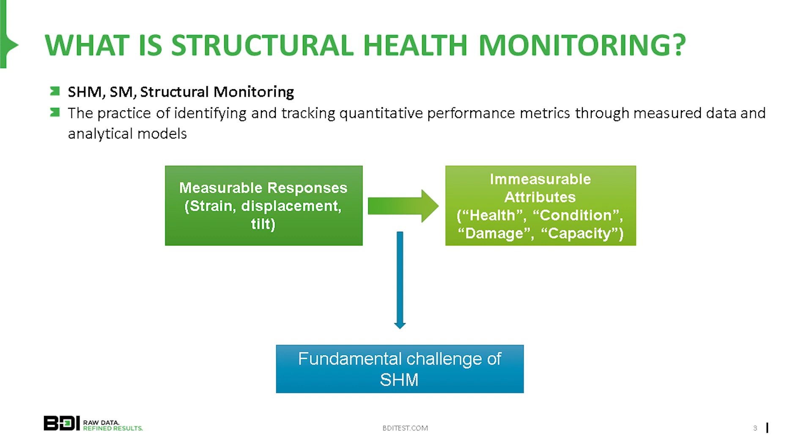Generally speaking, we're taking measured responses that generally we're not interested in. A single strain measurement or a measurement of displacement, typically I don't care and I don't know what it means. What I'm interested in are these other performance states: what is the condition of the bridge capacity? Is there damage? What's the remaining service life? These are the things I'm trying to get that I cannot directly measure.

So the challenge is, how do we translate the things that we can measure but we're not directly interested in, into the things that we're trying to achieve but we can't directly measure? So that's a little bit about the case study that we'll walk through.

So why and how do we do structural monitoring? Typically, they fall into one of three categories. We're trying to get a better understanding of structural performance, and it could be for a variety of reasons. Inspection support certainly is a large one.

We work a lot with consultants doing inspections that happen to find things out in the field, and they just need to know in better context, more than that point in time, what's happening. Is this crack moving? Is the structure moving? We found it in this certain condition or certain state, but how is it performing over time? And that's typically where we come in and support.

And then finally, from an operations and maintenance perspective, especially with movable bridges, complex signature structures, this is where integrating an O&M plan or asset management plan really makes sense for long-term permanent instrumentation - maybe not necessarily for your run-of-the-mill bridge inventory. But generally speaking, we have that need to keep a remote eye on potential problems.

And again, this is where integrating with RWIS - roadway weather information systems, weigh-in-motion systems, bridge weigh-in-motion - you can see the potential for integrating a lot of the existing ITS type information that's being collected into a more holistic asset management system.

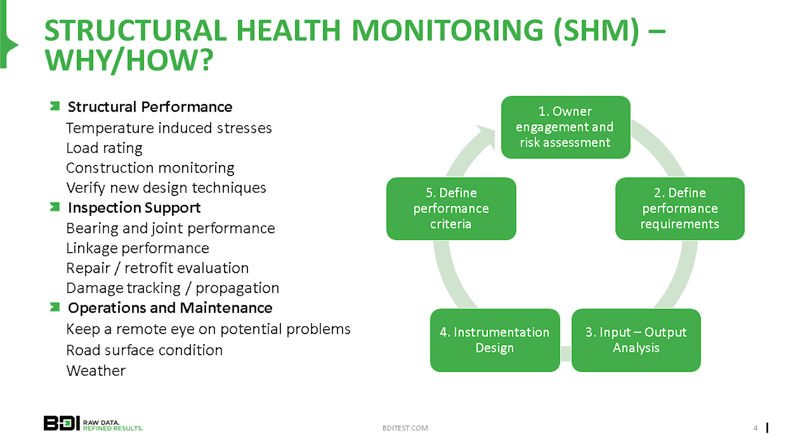After, typically, I'll just back up a second, the first two points there are typically already done by the time we usually see a phone call. A lot of times the problem's already been identified and people are saying, is this an appropriate application for deploying technology? That's where we'll work together with the structural engineers and owners to say, okay, yes, this is something we could measure. This is potentially able to be converted into a performance metric that we could help you inform. Now let's move forward through the process.

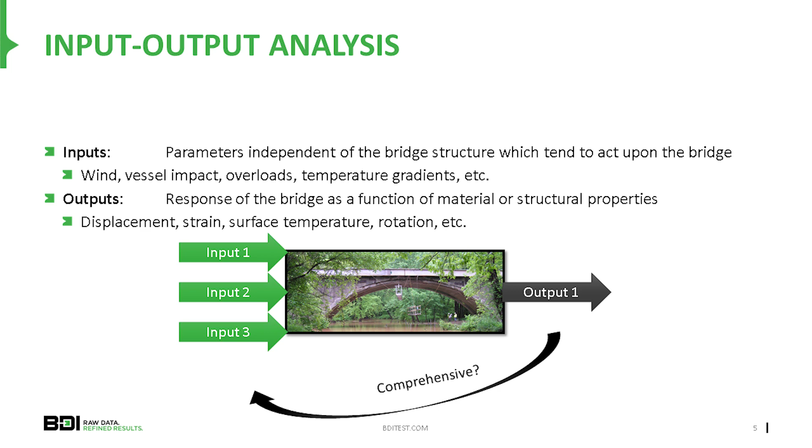Fundamentally, we need to ask, okay, what are the inputs of interest, and then what are the outputs? So if I'm just interested in overloads crossing this bridge, I need to understand, sure, I can measure strain, using that to estimate what loads are going across. But what other contextual forces is that structure being subject to that could also produce measurable strain—temperature changes, settlement, so on and so forth? I need to capture all those things too, so that I can give you a more accurate understanding of what those loads are going across.

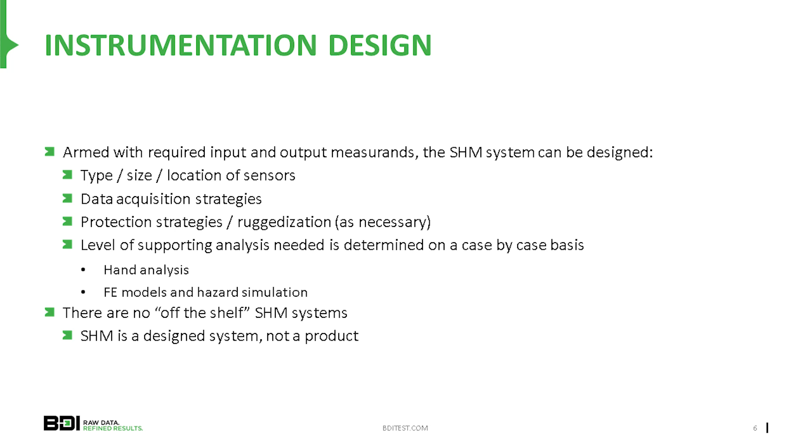Just walking through that process helps inform the instrumentation design, and then from there, going out into the field, doing the actual instrumentation and putting some performance criteria against this.

One point here that's important to make: a lot of times the measurements are able to be directly informed. If I'm interested in the underclearance of a bridge, that's a single measurement, bridge to water, measuring that air gap—I understand it intuitively. It doesn't need any fancy processing or interpretation, it's directly interpretable. But if I'm looking at displacement versus temperature, for an expansion bearing, that might not be as straightforward as you would expect. It could be a somewhat complex response.

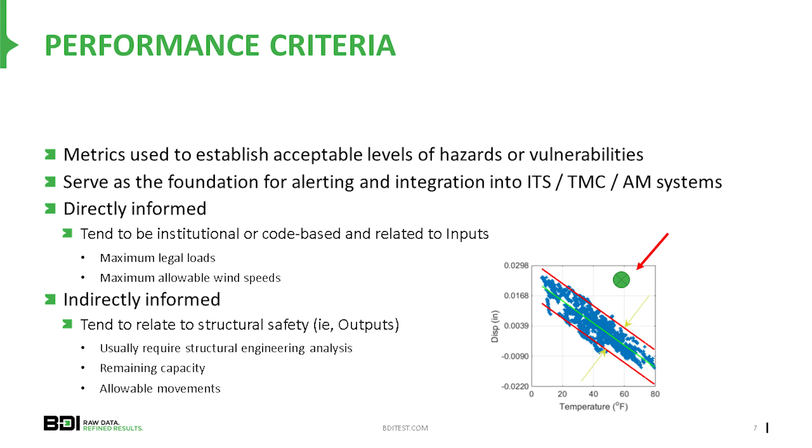The little graphic you see on the lower right, maybe that's a year's worth of data. Anything within those two lines I'm happy with, but it's that green point that I want to know if I'm starting to get measurements over there. So that's where it takes a little bit of an advanced step ahead, some kind of statistical analysis, to look at when we should be getting an alert from the system to know that we need to go out, deploy an inspection crew, and look at our expansion system.

Finally, from an asset management perspective, what are some of the issues where I think monitoring really could help? Certainly if there's unknown conditions regarding the structures—no as-built, foundations, unknown material properties—those are always structures that are good candidates for load testing, instrumentation, non-destructive testing. Changes in regulations, same thing. Obviously, if we have different rating requirements, again, those are good case studies for deploying technology like this.

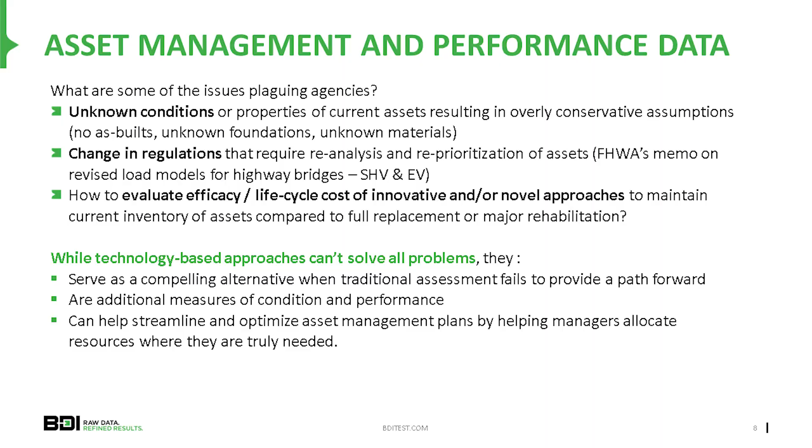And then certainly with monitoring, looking at efficacy or life cycle costs of innovative or new rehabs, designs, construction staging. We do a lot of work with erection engineers if they're deploying new or somewhat complex or risky construction erection techniques. Having that situational awareness certainly just helps put everyone at ease.

Okay, so I'm going to walk through a case study here for a signature bridge. The owner did ask to keep their name and the name of the bridge out of the presentation, as that would allow me to talk more freely about some of the conditions of the structure. So you will see pictures of a few different bridges. Those are just illustrative examples and not necessarily the structure at hand.

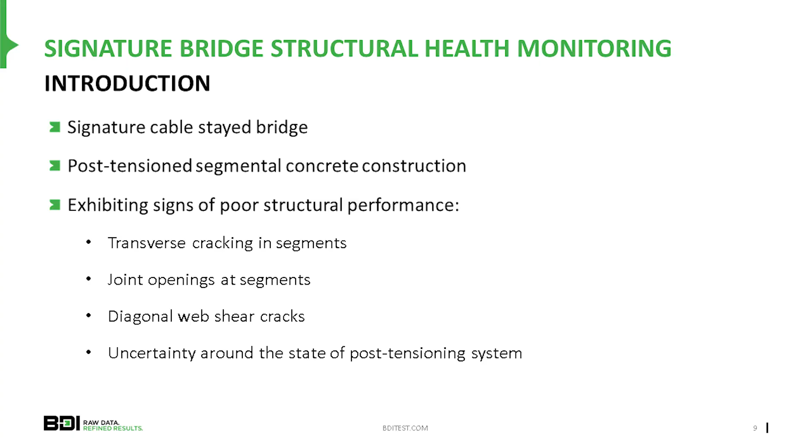But a little bit about the structure: it is a cable-stayed bridge, post-tension segmental concrete construction, and there's a host of issues on the structural performance related to the post-tensioning system. There's transverse cracking in the segments, joint openings in the segments, web shear cracks, and generally speaking, an uncertainty around the state of the post-tensioning system.

So this was really a driver of a lot of the global monitoring system that was designed and put in place. BDI actually worked together, starting with a document that WSP had put together. They were the engineer of record for the rating of the structure, and they put together a host of suggestions and recommendations for monitoring. So we started with that.

It was a great reference point because they already established these are the criteria that we're concerned about, where we think monitoring could help. So working together as a team between the three parties, we identified these five performance states that we were going to design the monitoring system around.

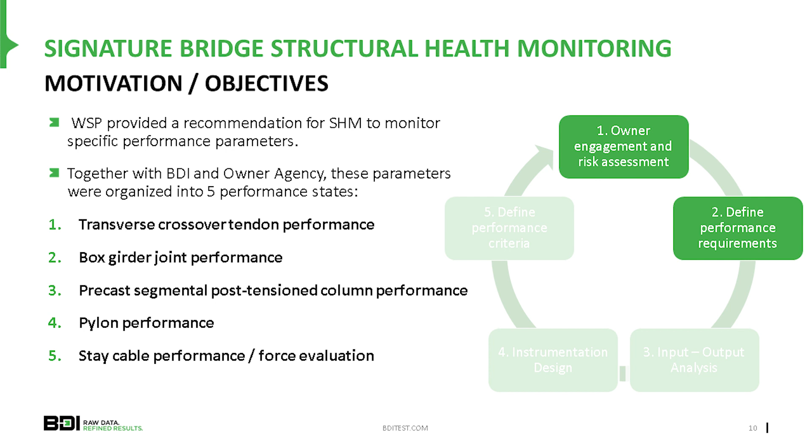So looking at transverse crossover tendon performance, that was one that was highlighted of interest. The joints of the box girders themselves, looking at the precast segmental post-tension column performance, the pylon, and then finally the stay cables themselves. I think there was a presentation yesterday talking about using vibration and acceleration measurements on stay cables to infer the in situ force, so that was one thing that they were interested in.

So the ultimate concern here was, what if we lose a tendon? How can we know and deploy a crew out to verify with inspection and then put in some kind of rehab or assessment of the structure?

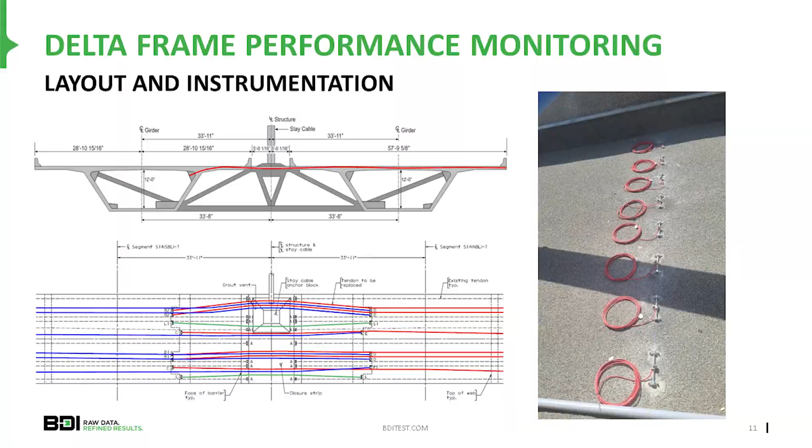Within the median section here is where these line of strain gauges are. And what we're doing is assuming that if we would lose the post-tension force in that strand, the force obviously has to go somewhere - it's going to go into that concrete deck. So putting that line of strain gauges in this section allows us to capture that force transfer if it were to occur from the post-tension system into the concrete.

Okay, so that was one. The second concern was just the performance of the post-tension box girder system itself, or the segmental construction itself. So there were two approaches here. One, you can see a typical tendon layout with all the different segments in place.

So using pretty straightforward instrumentation, crack meters, displacement sensors across those segments, and additionally capturing a good representation of temperature. Again, we want to get as much contextual measurements as we can to understand, is it temperature related, live load related, or some other phenomenon that we haven't yet learned.

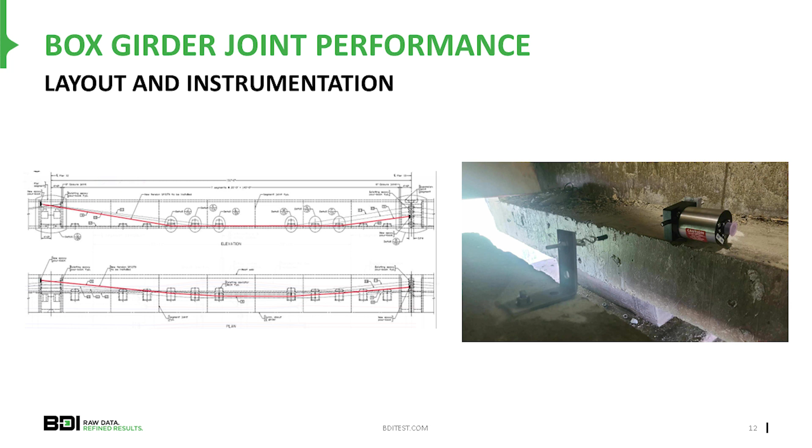Secondarily, we also wanted to capture the global movement of the superstructure itself - how the expansion bearing's performing. Here you can see a displacement sensor, again mid-installation, capturing segment-to-segment measurement at an expansion bearing. So looking at how the units are performing and expanding and contracting as temperature changes, and any existing flaws that were identified through inspection, how those are changing over time.

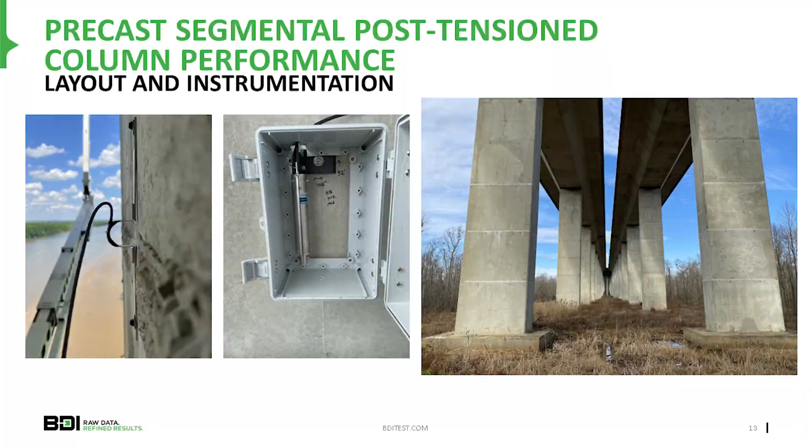With respect to the columns, there's a few approaches here. One, you can see a fairly precision crack meter on the left-hand side being installed out of a snooper. In the middle is a tilt meter, so naturally this allows us to track the position of the piers over time. The piers were instrumented at three locations - one near the bottom, one in the middle, and one towards the top. That allows us to understand, is the pier moving in a flexural shape or a rigid body shape? Obviously, that informs a lot about the condition of the foundation and whether there's any loss of rigidity towards the foundation of the structure. So that was certainly something of interest for the owner.

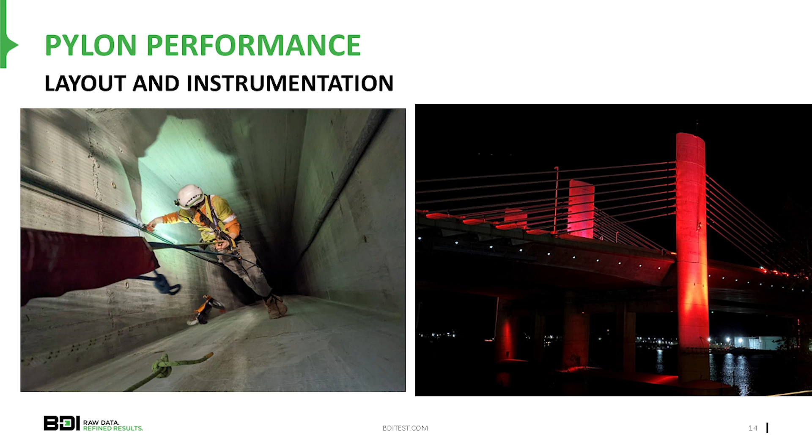Looking at the pylon performance itself, this shows some of the challenges we face on instrumentation. We've got to get into some pretty challenging places, so using ropes access is a great tool. On both of these applications, on the left we're instrumenting that tower with tilt meters at multiple positions along the height of the column, so we can infer what kind of shape it's moving in as the temperatures change. On the right-hand side, that was a structure that similarly had exhibited some cracking on the outside of the pylon.

Actually, I think he was doing some maintenance. It was a little bit of a formidable situation there with all the red lights. I think it was in October around Halloween time, so it was like a little eerie when we were out there. Of course, that was the only time we could get out and do some sensor maintenance, when he was getting blasted in the face with bright red lights.

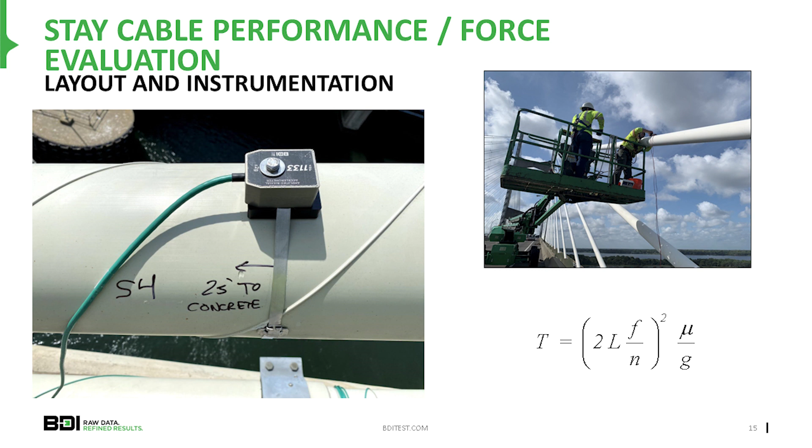Finally, I mentioned stay cable performance. I won't belabor the point—the speaker yesterday did a good job explaining typically how this is done. In that case, they were doing a short-term measurement of acceleration to infer the stay cable forces. This can also be done permanently. This owner had deployed this type of testing every few inspection cycles, so it was pretty clear to them: let's make the upfront investment now and permanently instrument it. We get this measurement continuously over time, saving the recurring cost of sending someone out to deploy all this testing, because it typically requires a lot of man lifts, lane closures, and support just to get out in the field and take these measurements.

If you're curious about doing this yourself, you can see the equation on the lower right-hand side to get your tension. The two biggest uncertainties you have to consider when deploying this method: you've got to know the length of the cable—fair enough, we should be able to measure that. But the bigger challenge, especially with older structures, is you need to know the unit mass per length of the cable. Newer structures probably have it in the design specs, so that's fairly easy to get, but with older structures that can be significantly challenging.

It's this term right here—any uncertainty in that number directly carries over into your computation of the tension force in the cable. So a lot of times we'll say this is plus or minus 10%, and that may or may not be good enough, at which point we say we need a sample of the cable to get that unit weight nailed down with 100% certainty. Just something to keep in mind.

So those are all the measurements, and tying it all together to make it happen—what is required from an owner's perspective to really deploy a system like this? Well, it requires a bit of hardware, especially for a permanent installation like this one. You're talking about ruggedized, hardened cabinets to house all your data acquisition. It needs power, it needs communications, and the system itself needs maintenance. It's not unlike any other computer or technology system being deployed—it needs to be checked and maintained just like any other piece of infrastructure on your assets.

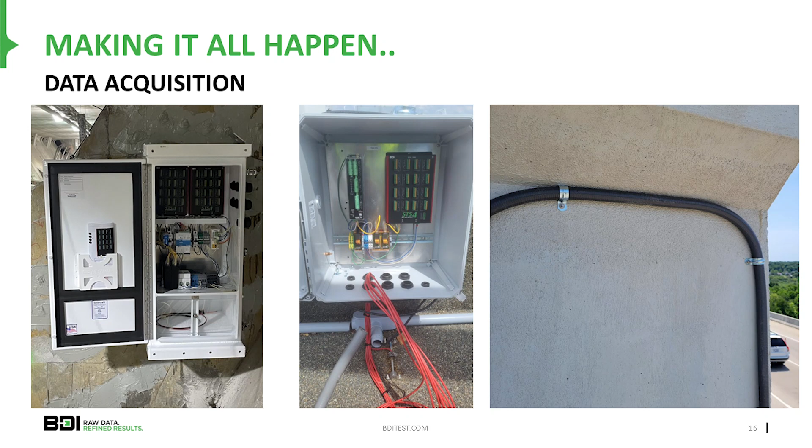So again, putting cables into conduit—you can see an example of that here—and everything into ruggedized and hardened cabinets.

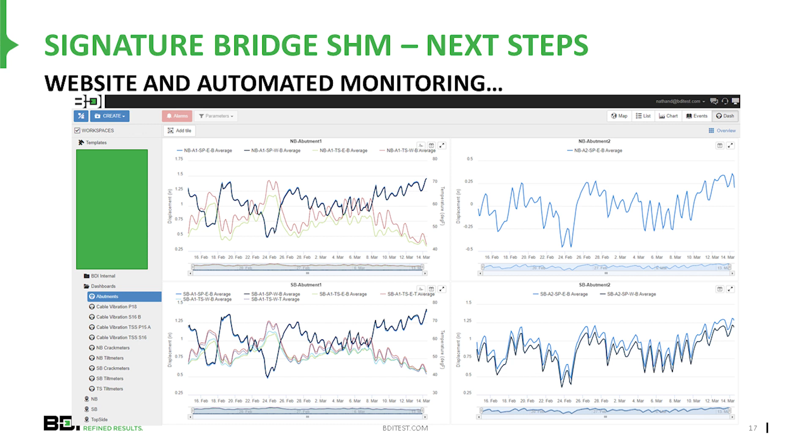The system's been up and running for this specific structure since technically October. We officially started the clock on the website in January. So we're going to be doing 6 months of monitoring for a baseline period, understanding from the coldest cold to the warmest warm that the bridge typically sees.

From there, we'll work together with WSP to put together alerting thresholds and requirements. At what point is the owner notified? At what point are we notified, WSP, and so forth? So now it's more automated. We don't need to manually intervene with the system all the time. The practice we're in now is establishing what normal behavior looks like.

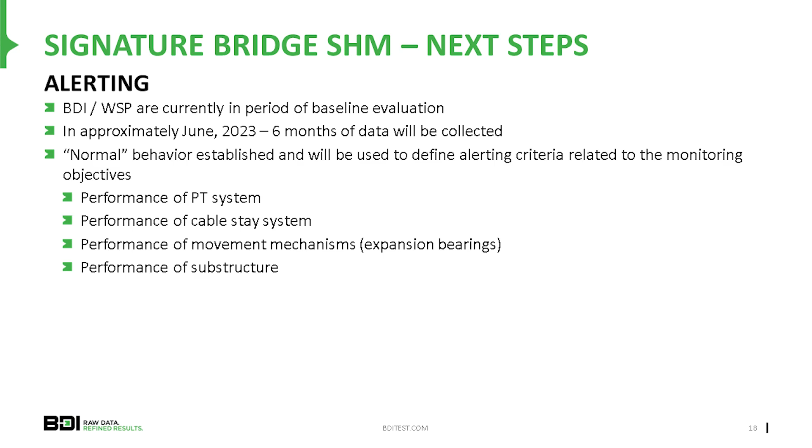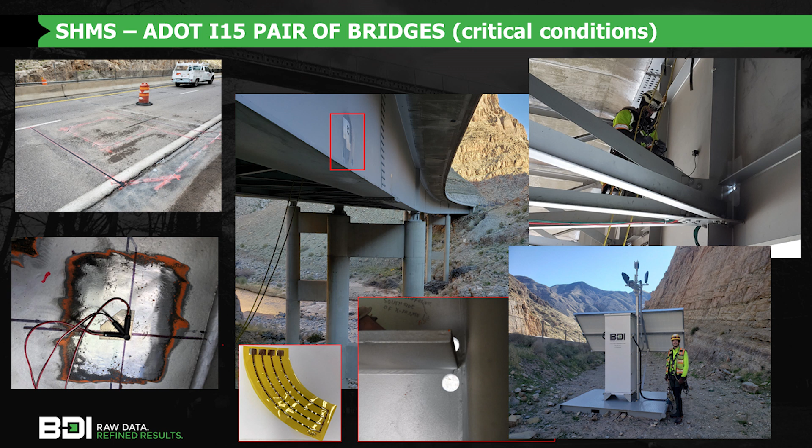This was in a very remote location in the upper northwest corner of Arizona, but on a very critical corridor for the state. It required, I won't say a small solar farm, but a pretty robust solar design of panels and batteries to support the system, since obviously there was no power out in this location.

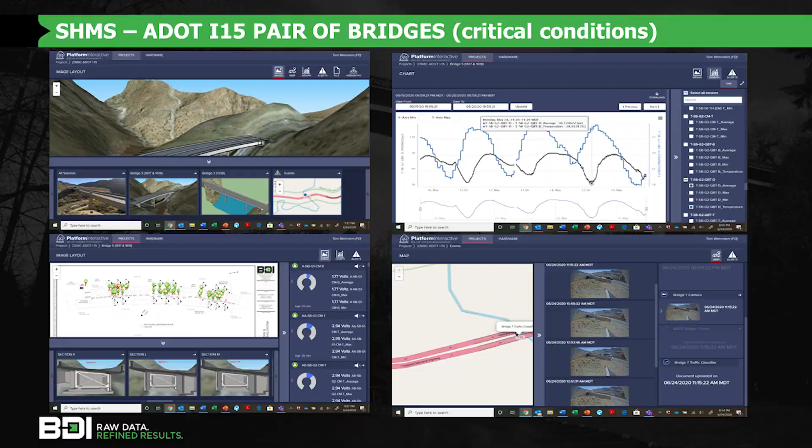With that kind of complex, comprehensive system, I think there were even cameras out there that were triggered off of the strain measurement. So if there was an overload, you could get a video of that vehicle crossing. More often than not, what we saw was multiple vehicles, right? But that's still good to understand and have that context.

Okay, thanks. All right, this is Sunshine Skyway. We've been monitoring this one again for stay cable performance. Talked about that quite a bit.

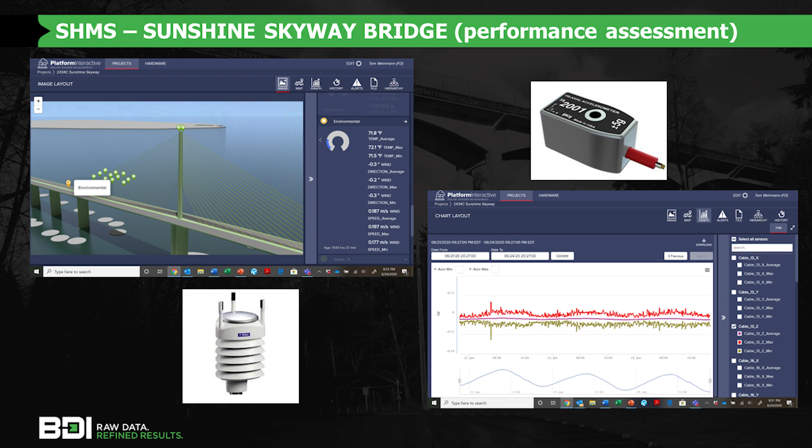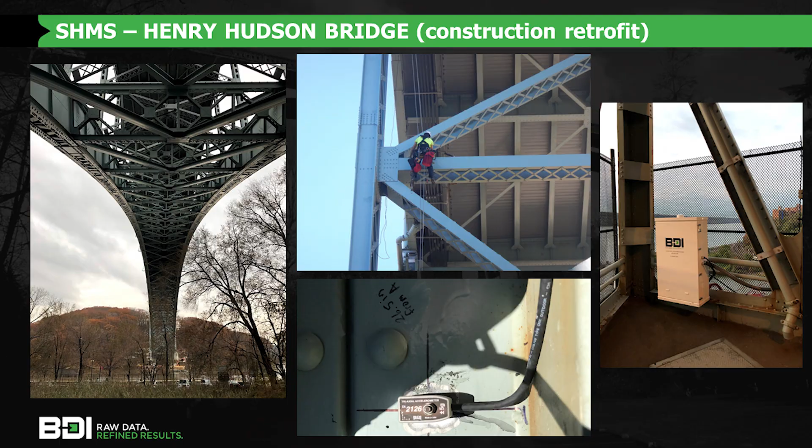Henry Hudson Bridge, actually this was a project that just wrapped up. There was pretty significant rehab on the skewbacks of the arch. Naturally the owner was concerned about the state of the structure itself, but also the repairs of the skewbacks. It was basically a redundant load path put in place in the foundations, and they're monitoring to see if that redundant path ever engages. So kind of a dual monitoring approach there.

All right, I'm going to skip ahead. I want to talk about this a little bit and then I'll wrap up. I mentioned that we're working on a project for Federal Highway related to a structural monitoring web manual.

So what we're working on is providing the complementary structural monitoring technologies as well. We're hoping this will really help provide owners and consultants a strong toolbox to understand - hey, I have this guy from BDI coming into my office saying monitoring is the best thing in the world, but what are the pros and cons and limitations of this? Is strain monitoring really appropriate for fatigue applications?

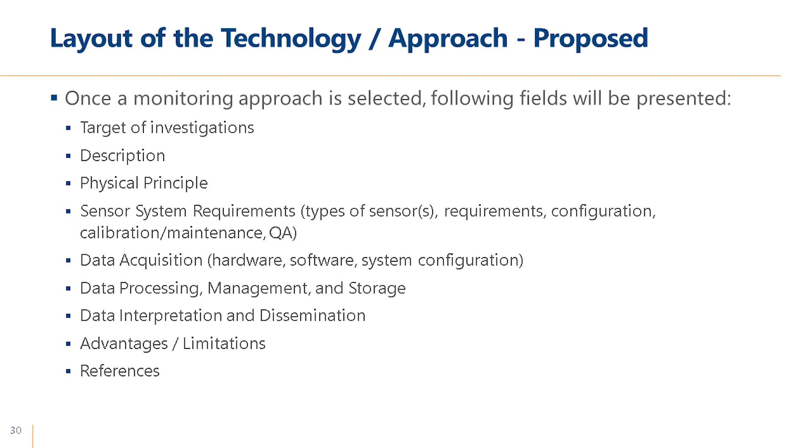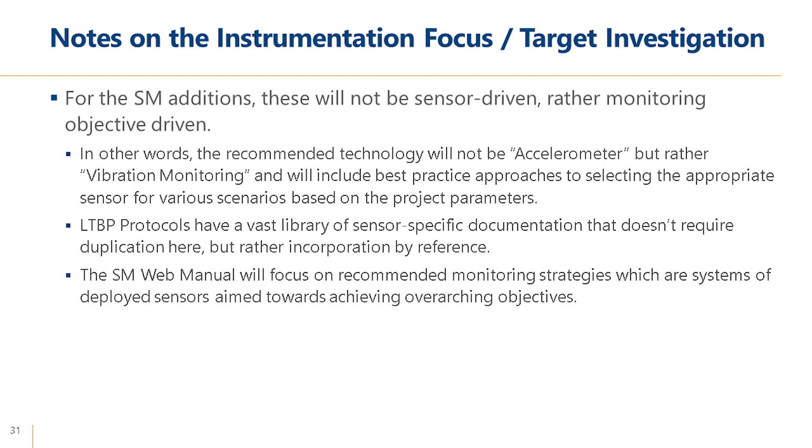We did a very comprehensive lit review for case studies and things like that, so you can actually go out and speak to folks that use that technology. So I don't want to run too long, but thank you for your time. Any questions?